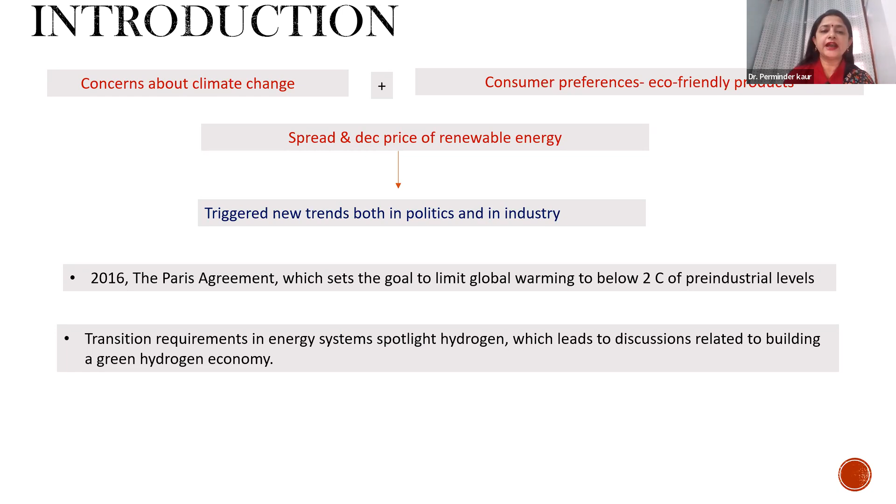This transition requires a change in the energy system. Where earlier we were using fossil fuel based energy systems, there is a need to move towards environment friendly energy sources like hydrogen, which is a totally non-carbon based source. This has led to discussions related to development of a green hydrogen-based economy, involving various individual players like hydrogen consumers, producers, plant operators, manufacturers - requiring combined efforts of all these players to achieve a paradigm shift in the renewable energy sector.

So first of all, why are we discussing this? Why hydrogen? Because first of all, it is a non-carbon based fuel. Being totally non-carbon based, it doesn't emit any carbon monoxide or carbon dioxide, so it is totally environment friendly.

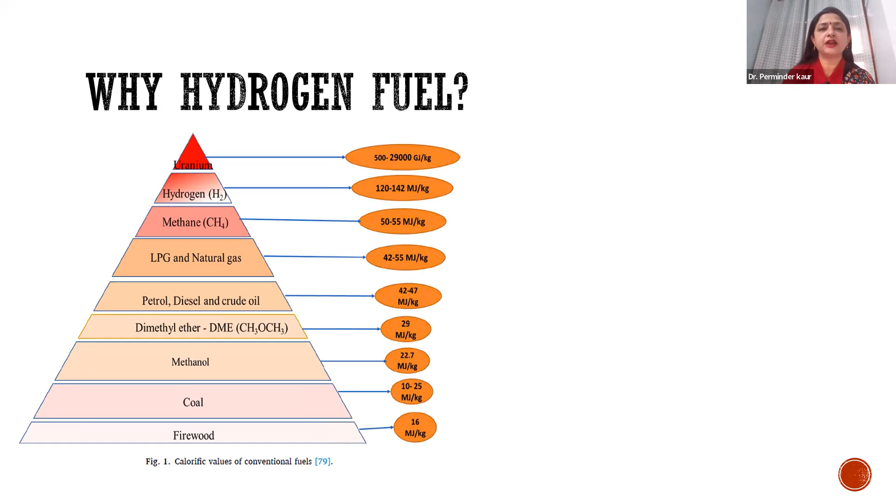That of any fossil fuel, it doesn't emit any bad smell, doesn't have any odor. There is no color. It's totally non-polluting and clean source of energy. It can be used both in gaseous as well as liquid form.

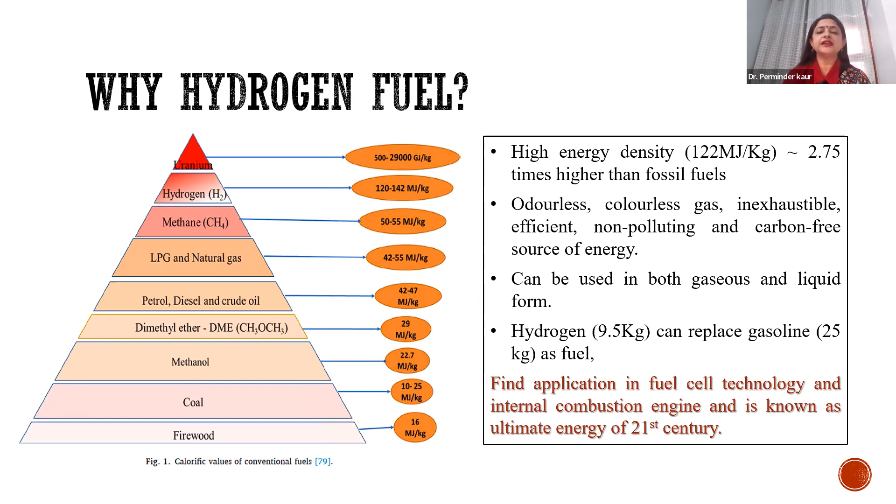Hydrogen thus shows a clear potential to replace other fossil fuels in the energy sector, and it finds application in various technologies. That is why right now we call hydrogen the ultimate fuel of the 21st century.

So what are the pathways, how can we lead to a transition in the energy sector? Presently we are totally dependent on fossil fuel, so randomly we can't develop a non-fossil fuel based energy sector. There has to be a pathway to achieve the transition from a fossil fuel based economy to environment friendly technologies, and this requires a consistent effort.

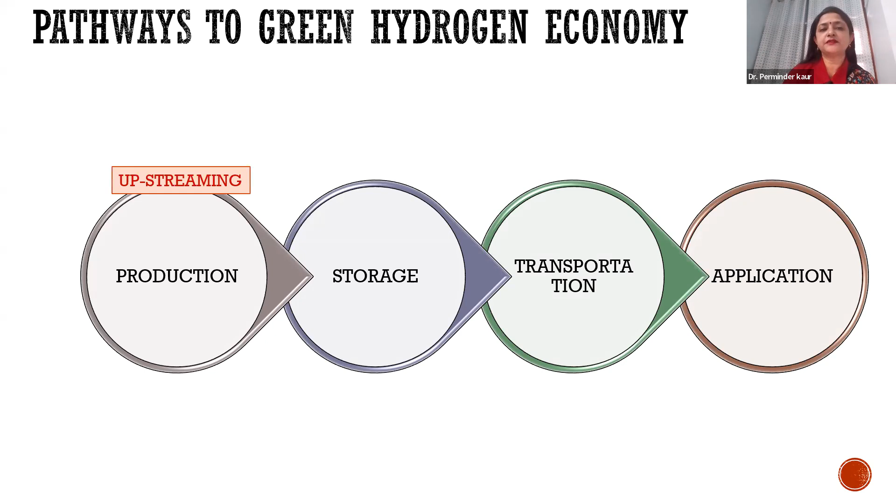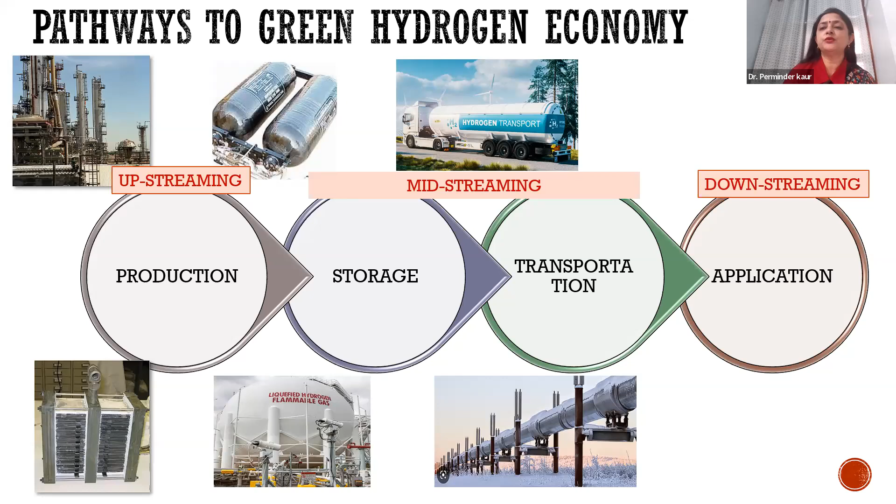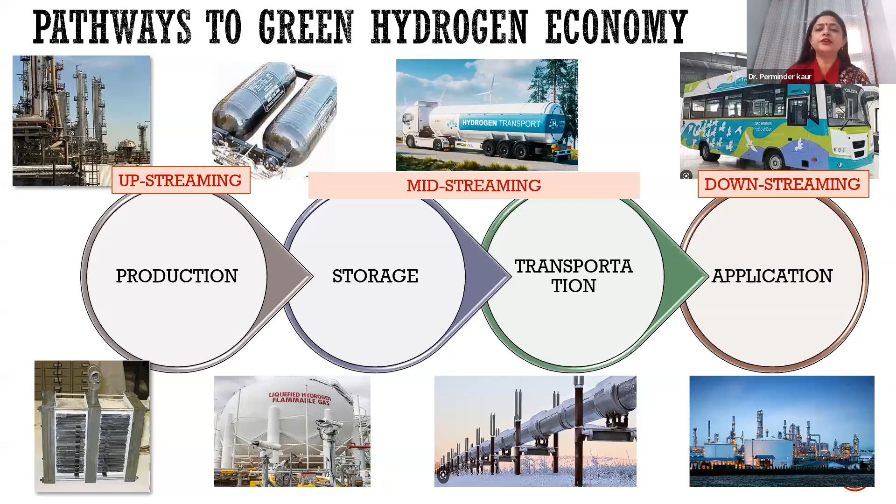The process is totally multidisciplinary and requires effort from a large number of sectors, from upstream production processes like production of hydrogen, to midstream processes like storage and transport, to downstream processes like its application in fuel industries as a chemical, for manufacture of ammonia, for refineries and various sectors. So we need a detailed discussion on all four aspects: production, storage, transportation, and application.

When we talk about hydrogen production, hydrogen already exists and has been used for a very long time by human beings. It is a major component in various industries like ammonia production, steel production, and refineries - a very important component in all these industries.

Traditionally, hydrogen can be produced through natural gas, which can undergo steam methane reforming, where natural gas with methane as its major component reacts with steam to produce water gas, which further undergoes the water gas shift reaction to produce hydrogen. This type of hydrogen, produced through natural gas, is known as gray hydrogen.

Depending on the source from which we are producing hydrogen, different codes are given. Although the hydrogen is the same, it's just a color code given so that we can identify its value chain - how green that hydrogen is.

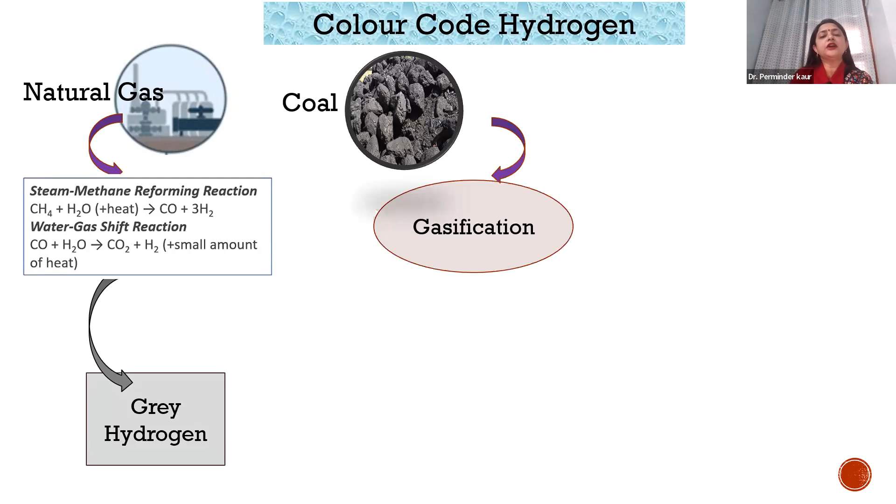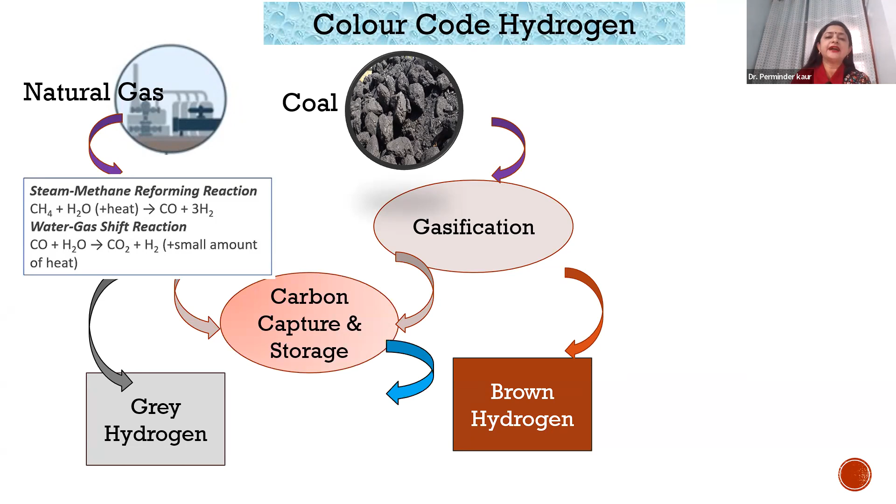In case we use coal or any other fossil fuel, which undergoes a gasification process in a gasifier, it produces brown hydrogen. Then, in both cases using natural gas as well as coal, if we capture carbon to make it environment friendly, that leads to production of blue hydrogen.

Further, in case we use electricity directly from the grid - the general electricity we use at home - it can undergo an electrolysis process to produce yellow hydrogen. So these are the various codes of hydrogen: gray, blue, brown, and yellow, based on the source from which we manufacture it.

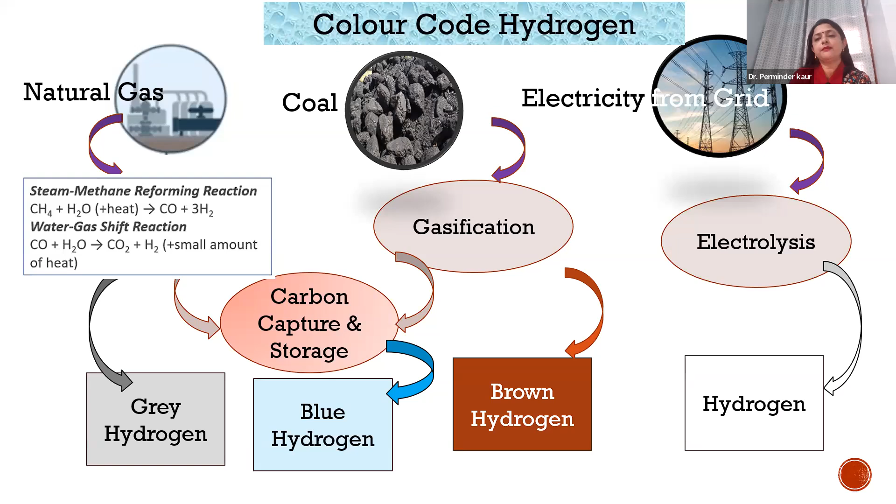Coal and natural gas, various byproducts from refineries, biomass, as well as solar and wind energy - all these sources can undergo various conversion processes to produce hydrogen. When we use coal or natural gas through carbon capture technology, or byproducts of various processes, or even biomass, which can undergo conversion technologies to produce biogas and bioethanol, these can further be converted into green hydrogen.

The future of the technology - green hydrogen - lies in the use of solar and wind energy to run an electrolyzer, which is a totally green process. We use solar and wind energy to run an electrolyzer, and using this process we produce green hydrogen. This is the major impetus and major field of research currently underway to produce green hydrogen.

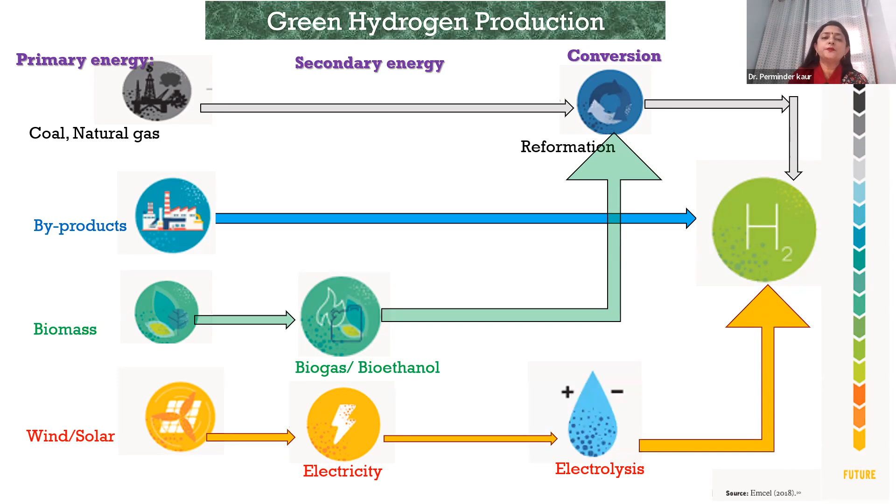As for the present status, the majority of hydrogen is produced through steam methane reforming. Oil reforming or coal gasification is also used to produce hydrogen, while production through environment-friendly technologies or renewable energy to run an electrolyzer currently has only a very minor share of the total hydrogen available in the market.

Before talking in detail about the various kinds of electrolyzers which can be used to produce hydrogen, let's recall electrolysis, as we know from class 9th or 10th. In an electrolyzer, we use water, H2O, which is hydrogen and oxygen. It can undergo electrolysis through electricity, breaking down water into hydrogen and oxygen gas. At the cathode, hydrogen ions react with electrons to produce hydrogen gas, while at the anode we get oxygen gas.

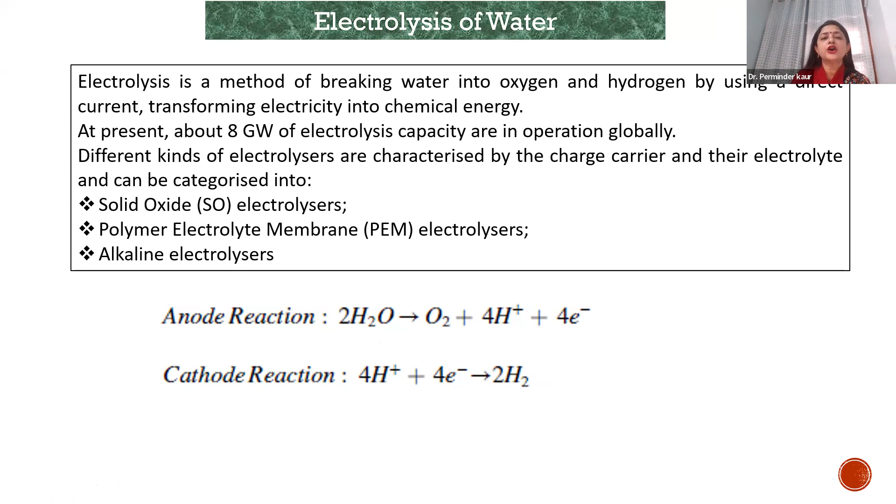Depending on the kind of electrolytic solution we are using, the kind of electrodes, and the reaction conditions we are operating on, electrolyzers can be further divided into categories: solid oxide electrolyzers, polymer-based electrolyzers known as PEM, or alkaline electrolyzers.

The process of electrolysis has undergone tremendous changes over time. Electrolyzers were initially developed in the 1800s through diaphragms, and industrially they were basically alkaline water electrolyzers. There were a lot of challenges regarding their industrial scale application during that time.

Further, a lot of changes have happened in the process. Various technological breakthroughs occurred from 1950 to 2020. During these years, electrolyzer technology went through various changes, from alkaline based electrolyzers to polymer based electrolyzers, and now solid state electrolyzers. When polymers were developed in the 1950s, a technological breakthrough happened in the electrolysis process.

Then polymers were discovered. They were basically used for life support applications. So during the 1950s to 1980s, electrolyzers based on polymers were discovered.

With further breakthroughs in the technology over the complex system, there was development of PEM water electrolyzers, but there were still challenges related to cost. During the decade of 2010 to 2020, a lot of changes in electrolyzer capacities happened, and large-scale demonstration of polymer-based electrolyzers occurred, with many changes in this stream.

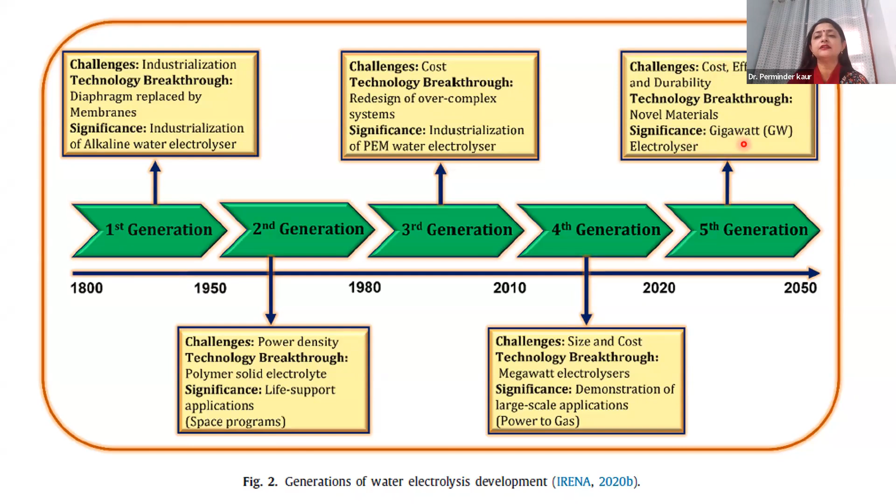In the first generation of electrolyzers, they use a liquid electrolyte solution like sodium hydroxide or potassium hydroxide and water, which can undergo electrolysis. A diaphragm was used in this process, and it can split into hydroxide ions, producing hydrogen at the cathode and oxygen at the anode.

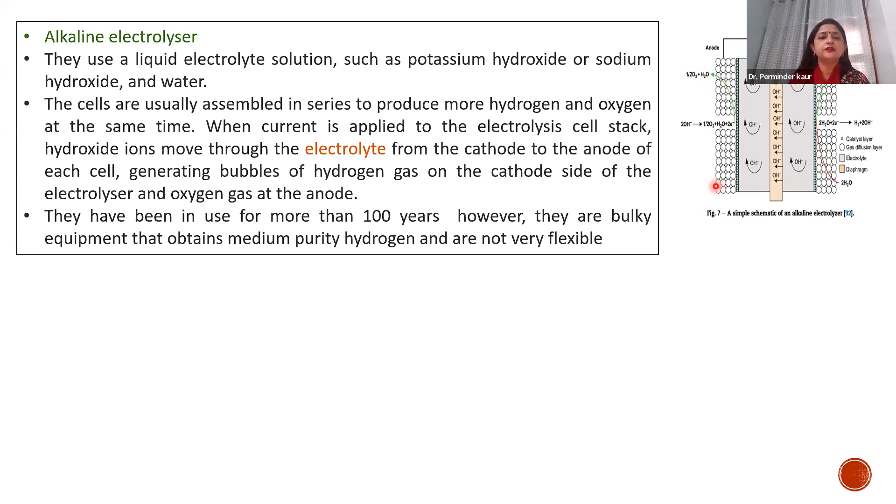There are various advantages of this technology because it's old. This is not something new; we have been using it since the 1800s. So it's well established and available on a commercial scale. Noble metal-free electrocatalysts can be used, their cost is low, and they have long-term stability, but their efficiency is around 50 to 78%, and their cost is around 270 US dollars per kilowatt.

However, availability of electrolyte is a concern, as a high concentration potassium hydroxide solution is required.

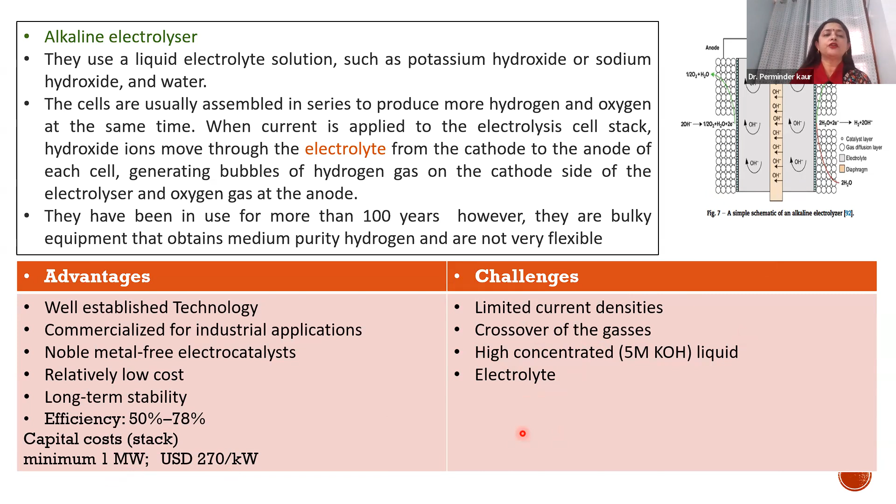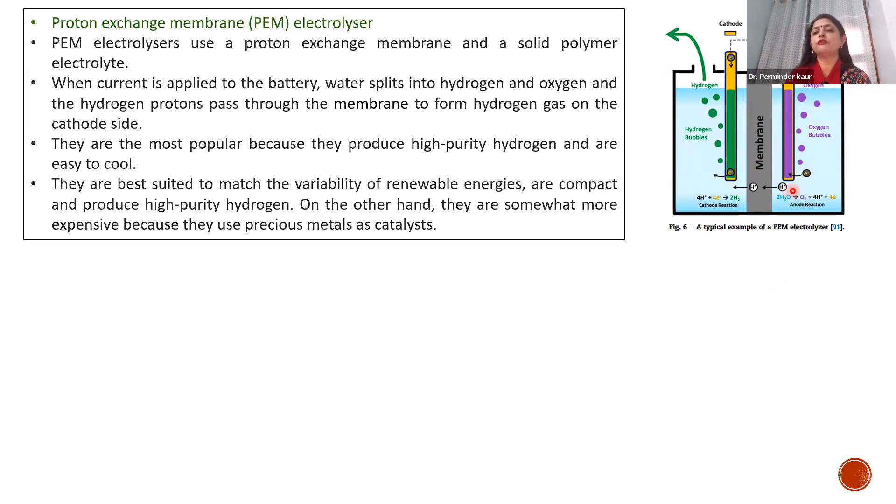A lot of changes have happened moving from alkaline electrolyzers to proton exchange membrane electrolyzers, where a membrane is used instead of a diaphragm. As we can see in the diagram, we have a membrane instead of a diaphragm, and this is a very compact system where hydrogen gas is evolved at the cathode and oxygen gas at the anode. The basic process is the same; it's just the change of system from diaphragm to membrane and development of novel materials, which has led to the development of PEM electrolyzers. Nowadays it is also a commercialized technology.

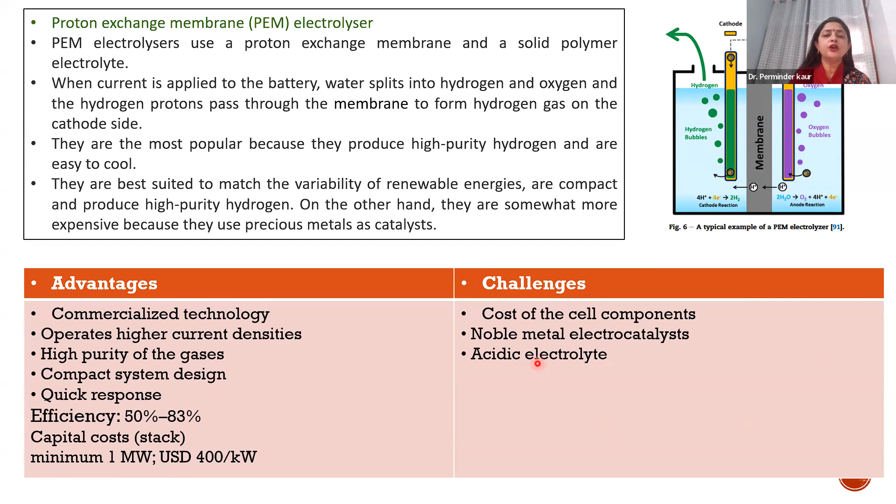There are electrolytes which can further help to reduce the cost of PEM electrolyzers.

Further, solid oxide electrolyzers, which operate at high temperature, are the material of the future, on which various researchers are right now working to develop and transport this technology to commercial scale, improving their technology readiness level. Solid oxide electrolyzers are also known as...

Sorry, is there any issue, am I audible? You're audible, ma'am. Please go ahead.

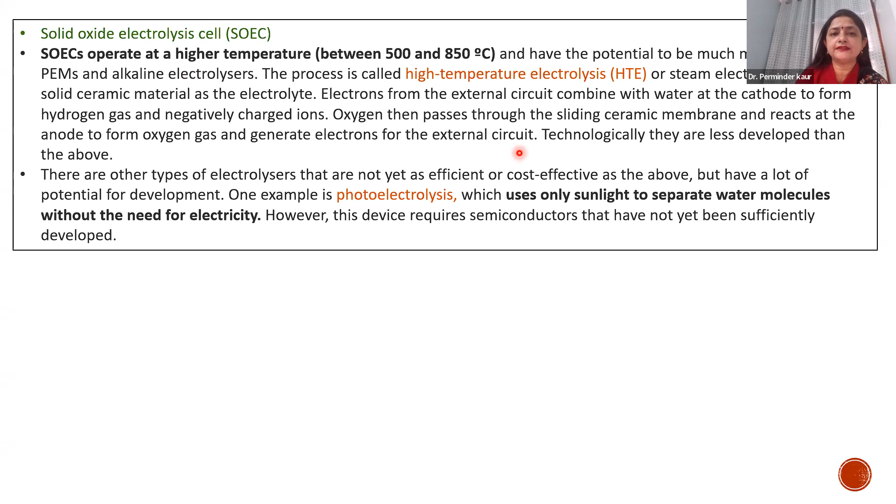Solid oxide electrolyzers operate at very high temperature, between 500 to 850 degrees Celsius. The use of high temperature overall helps in the breakdown of water more easily, leading to higher efficiency in solid oxide electrolyzers. There are various advantages, like they work at high temperature, so they are highly efficient to break down water easily. Their efficiency is very high.

Their cost is right now very high, although there is need to work on the development of their stability and their lab scale conversion to commercial scale. The work is still underway. Various companies and research groups are working to commercialize this technology. There are other types of electrolyzers also, which are not as efficient and cost effective as discussed above, but they have a lot of potential for development.

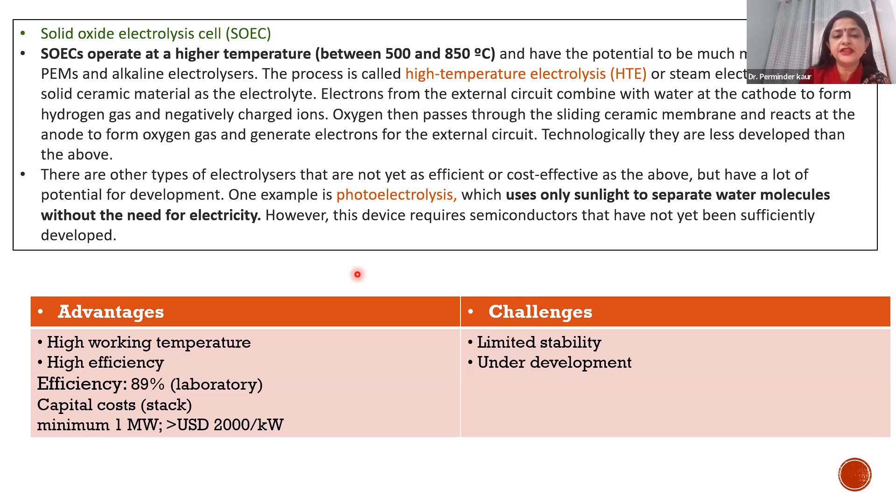One of the examples is photoelectrolyzers. As the name suggests, these use sunlight to separate water molecules without the need for any electricity. Since we will not need any electricity, this is going to be a revolutionary material. Many of these technologies are still under the stage of development. A lot of research is happening every day in the field of electrolyzers, which is the heart of green hydrogen production technology.

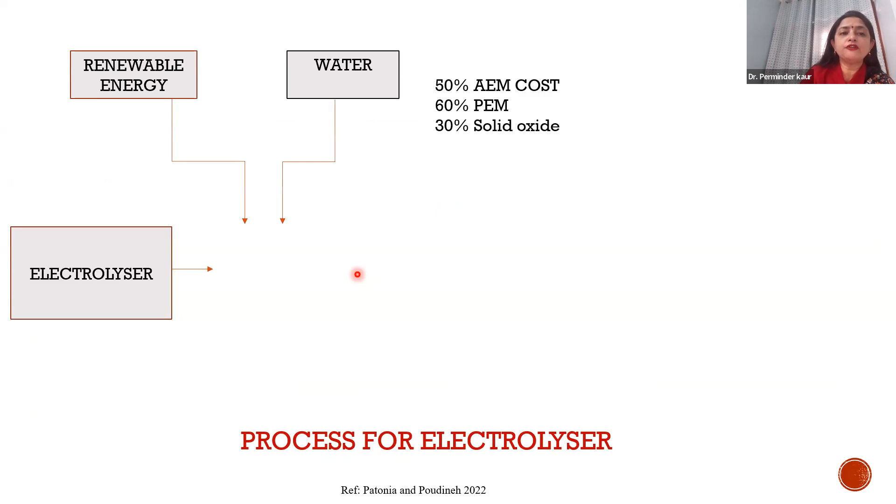What are the various components required for manufacture of an electrolyzer? To run an electrolyzer, the running components required are basically a continuous supply of renewable energy, either solar energy or wind energy, along with the availability of water resources, which can undergo electrolysis in an alkaline or PEM electrolyzer.

Basically, a PEM electrolyzer's cost falls under two components. One is the stack, which costs around 50% for alkaline electrolyzers. Stack cost is very high in case of PEM electrolyzers, and stack cost is around 30% of the total cost in a solid oxide electrolyzer.

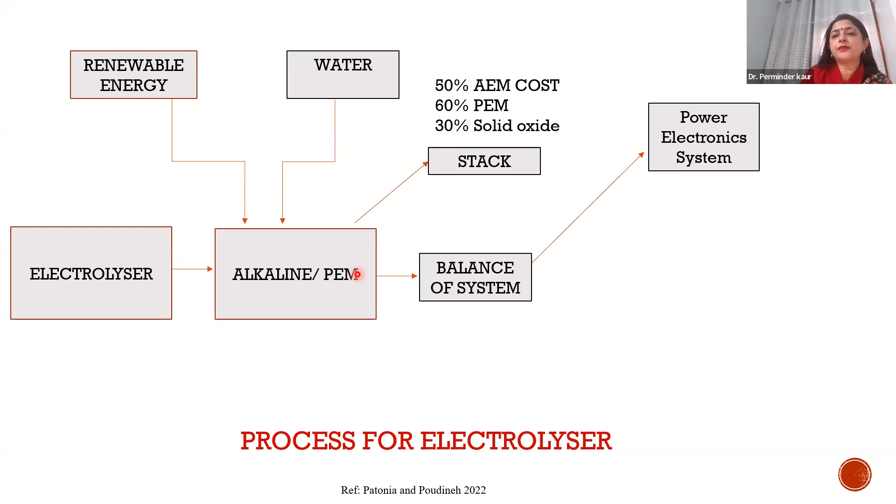The balance of the system includes a power electronic system, a gas purification system, and a water purification system. So the rest of the cost is one component, the stack, and the other component is power electronics, gas purification system, and water purification system. In order to install an electrolyzer, we need all these components. While the stack and electrolyzer will be the fixed cost, running cost will include the continuous supply of renewable energy and water.

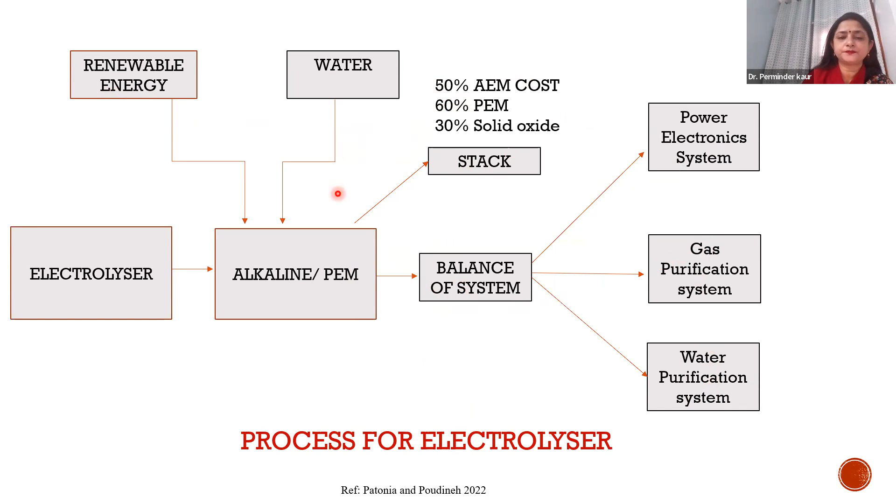All these technologies are right now expensive. So the government, through the National Hydrogen Mission, is providing incentives, support, and capacity building to reduce the overall cost of production of hydrogen produced through solar energy or other renewable energy sources.

A breakdown of the levelized cost of hydrogen from the electrolyzer route has been studied in another report. It has been found that right now the levelized cost of alkaline electrolyzers is around 350 rupees per kg, but by 2050 it should fall to 200 rupees per kg. For alkaline electrolyzers by 2050, the cost should be less than 100 rupees per kg, and for PEM electrolyzer also, through the solar process, the cost should be less than 100 rupees per kg.

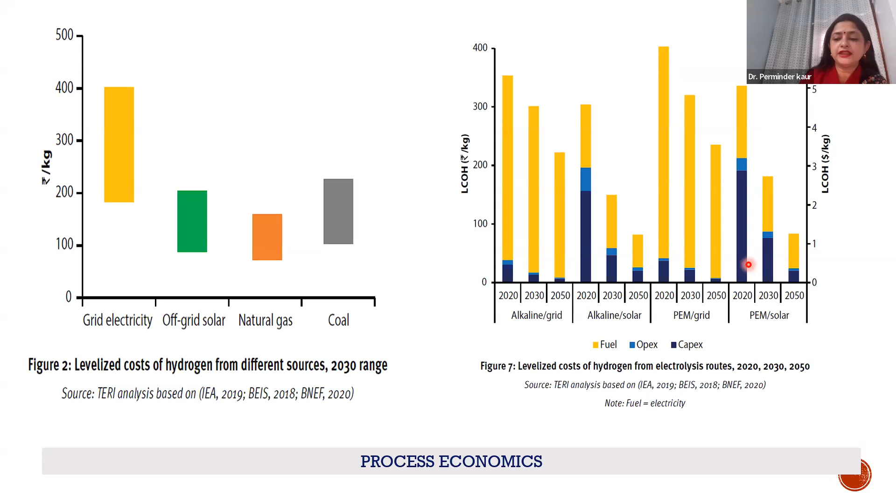The second important component of hydrogen economy is its storage. Various materials and physical systems have been developed, because storage is the main system which will provide a linkage between the hydrogen producer and hydrogen consumer. An efficient energy storage system can only boost an efficient hydrogen economy. We need an excellent, cost-effective, intermittent energy storage system, which needs extensive research.

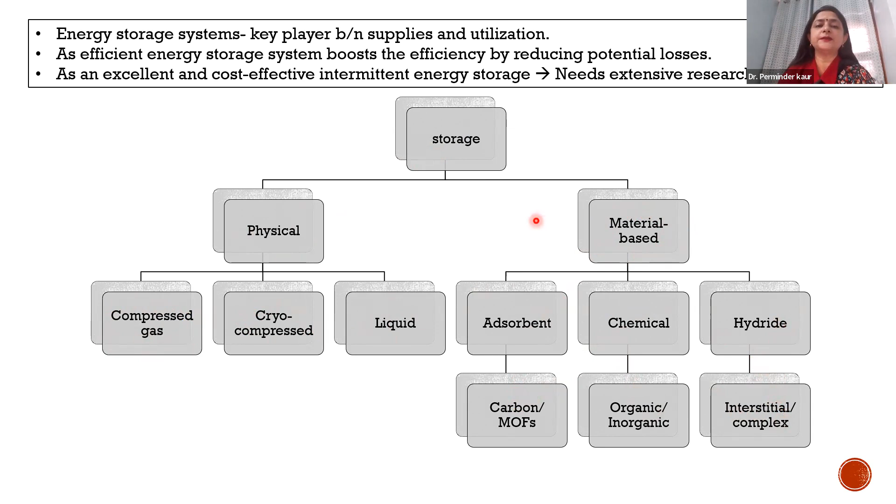Right now there are basically two kinds of materials used for storage. One is the physical system, which includes systems like compressed gas, cryo-compressed, or liquid systems. Then various novel materials have been investigated and studied to store hydrogen. Various kinds of adsorbents, which can be carbon based, or various kinds of chemicals, which can be organic as well as inorganic, or hydride materials, which can be interstitial or complex, have been developed to store hydrogen under different conditions.

The third important component of hydrogen economy is its transportation. Once we have produced hydrogen and stored it under the right conditions, we need to transport it to the applications where it is going to be used. There are a variety of hydrogen transportation systems which have been proposed. The most common hydrogen transportation methods are compressed gas cylinders, cryogenic liquid tankers, or pipelines, or we can blend it with natural gas and transmit it through the same pipelines through which natural gas is transferred.

There are various compressed gas containers, and we have pipelines. We can also blend hydrogen with natural gas. Blending with the natural gas pipeline network is viewed as a way of transporting pure hydrogen to market. All these technologies are under a stage of development.

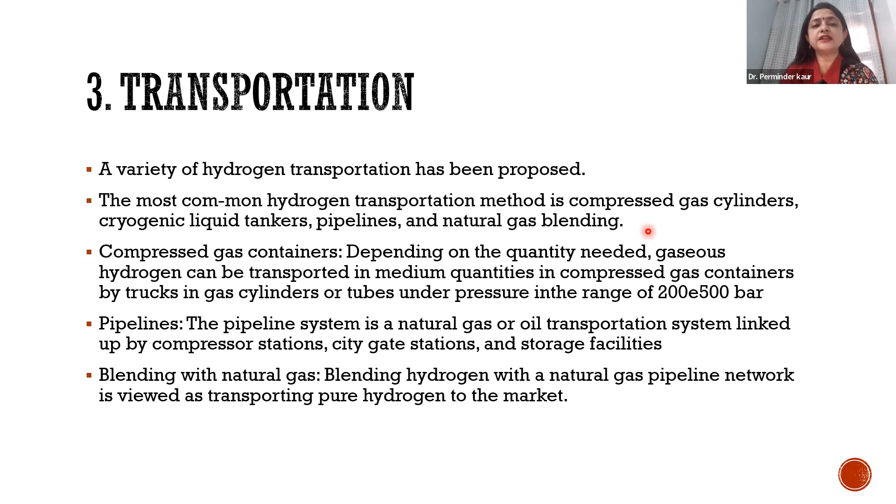Broadly speaking, the hydrogen transportation system comes under two categories: either through hydrogen pipelines, or hydrogen mixed with CNG pipelines, or tube trailers, which come under compressed gaseous transport systems. Hydrogen can also be converted into liquid form and stored under liquid cryogenic systems or LOHC systems.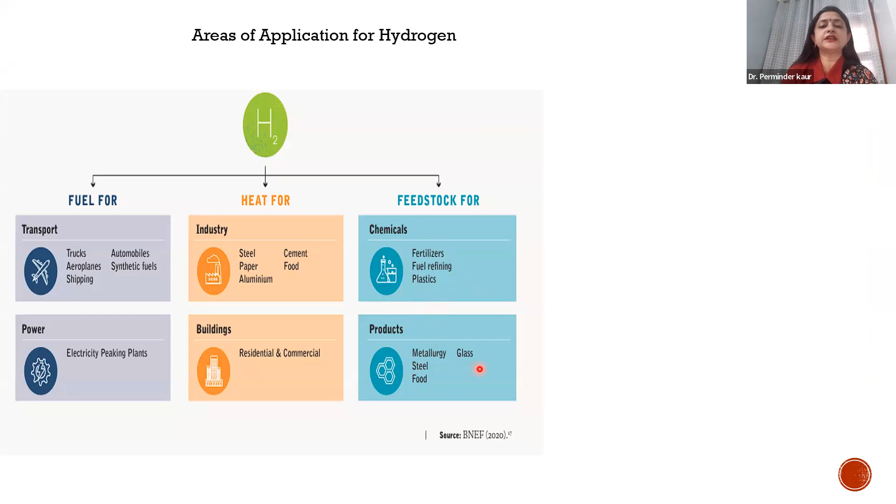Then comes another important aspect of hydrogen-based economy, which is application of hydrogen. Application of hydrogen is not something new. Hydrogen is already used for multiple industrial processes. Hydrogen in the Haber process for production of ammonia is a very well-known technology. It can be used as a feedstock for various chemicals in the fertilizer industry, in fuel refining, in production of plastic. It can be used to produce metallurgical glass, steel, or food. So various kinds of chemicals can be produced through hydrogen.

Then it can be used as a heat source for various industries like steel or cement-based industries, which are known to be very energy consuming sectors. The use of hydrogen instead of fossil fuel in steel or cement industry can give a boost to environment-friendly technology and control the emission of greenhouse gases. Then various industries like paper, food, or aluminium industry, it can also be used for heating residential and commercial setups.

Then one of the emerging areas where hydrogen can be used is in the transport sector. Nowadays you must have read headlines like Germany has launched a hydrogen train, or in Delhi we have launched hydrogen gas buses. Government is working on hydrogen-based train systems, then in the shipping sector. The development of hydrogen as a fuel in transport is one of the future areas, used in trucks, aeroplanes, shippings, automobiles, or as a synthetic fuel. Then various electric peaking plants can also use hydrogen as a source of power.

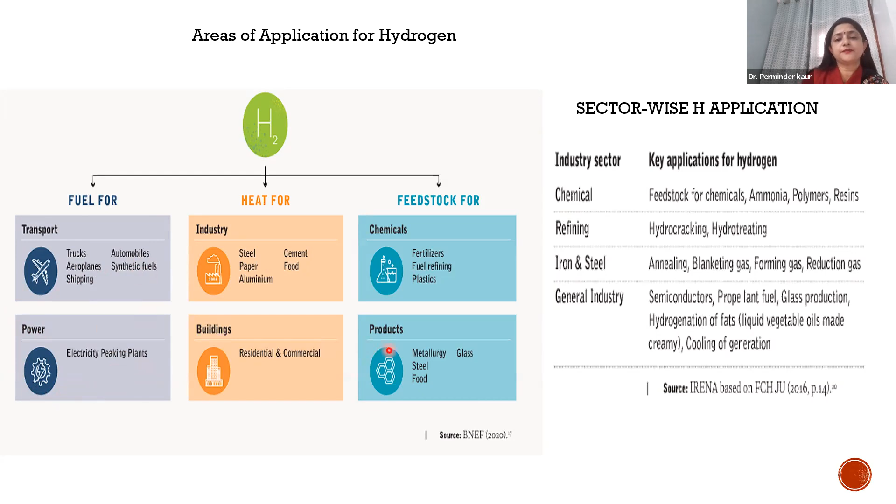Now what is the significance of hydrogen for the market? Various reports and studies have been undertaken by research institutes and think tanks, various organizations, everyone trying to investigate the effect of hydrogen on the market. It has been found this is a really exciting time for the market, with a large number of hydrogen-based companies in the stage of launching, or already launched, many of them listed in the stock exchange in the past 12 months. Market has seen a large change.

Global hydrogen market has been evaluated at around 0.83 billion US dollars in year 2021. Various projections and expectations are there from the hydrogen sector, and it has been found that the hydrogen-based market can increase to around 90 billion dollars by 2030. So for early investors, there is a lot of scope, they have a lot to watch.

From an investment perspective, it is highly encouraging to see government backing in this emerging market, as it drives interest and reassures investors in viability. Government is a big investor nowadays itself, trying to support the development of various technologies through incentive schemes, tax breaks, and mandates under a stage of development. So with this rapid development of technology and research initiatives, large-scale adoption is expected within a few years.

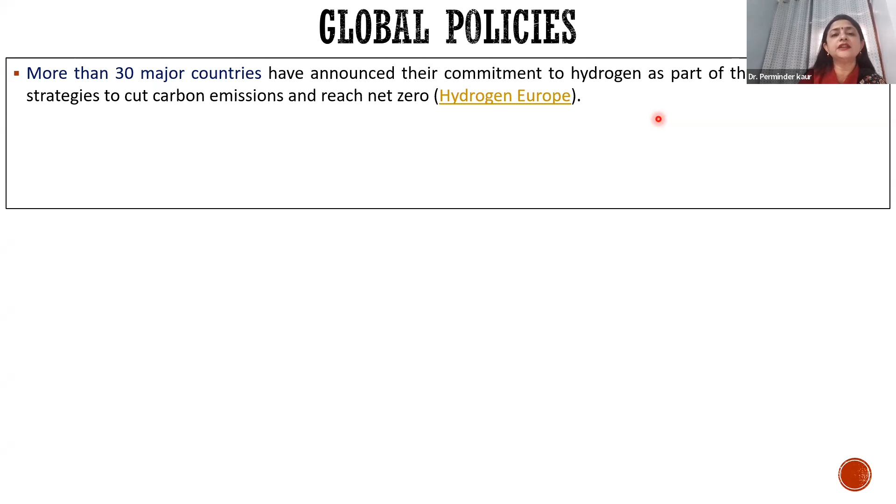Now on a global scale also, various countries have announced their commitment for hydrogen as part of their strategy to contain climate emissions, reduce greenhouse gases, and meet net zero targets. Like in the United States and European Union, they have given a target to reach net zero by 2050, while India has a net zero target of 2070. We can't reach there in a day; we have to move step by step through the use of these environment-friendly technologies.

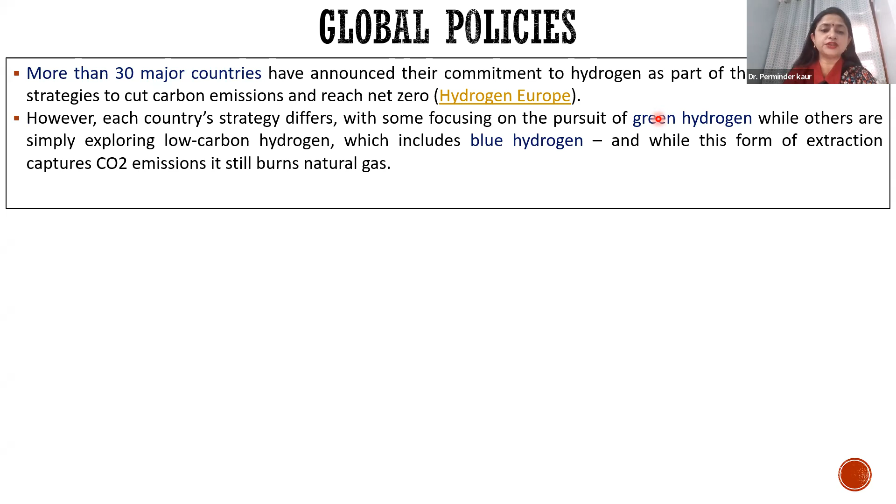Looking at the Indian scenario, National Hydrogen Mission has been launched by the Government of India. Recently, some guidelines have been launched again in January 23. Government is providing support to various organizations so that India can become a global hub for the production, usage and export of green hydrogen and its derivatives. This will contribute to India's aim to become Atmanirbhar Bharat.

The mission will support the replacement of fossil fuel or fossil fuel based feedstocks with renewable energy sources like green hydrogen. So the research work as well as the applications of hydrogen, in the usage and production of hydrogen in these sectors will be encouraged.

The expected outcome of this mission by 2030 includes annual production capacity of 5 million metric tons per annum, renewable energy capacity addition of around 125 gigawatt, with investment of around rupees 8 lakh crore. It is expected that this will lead to creation of around 6 lakh full-time jobs, and 50 million metric tons of CO2 emission will be curtailed. These data we have taken from the website of Ministry of New and Renewable Energy.

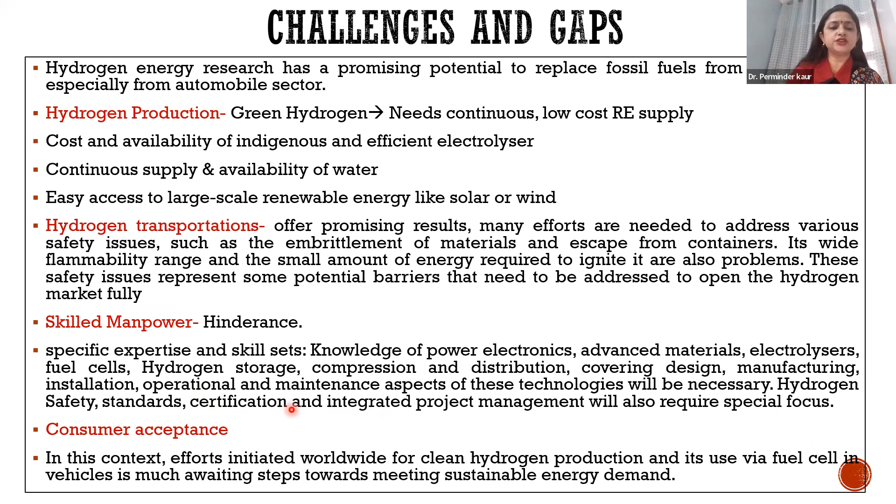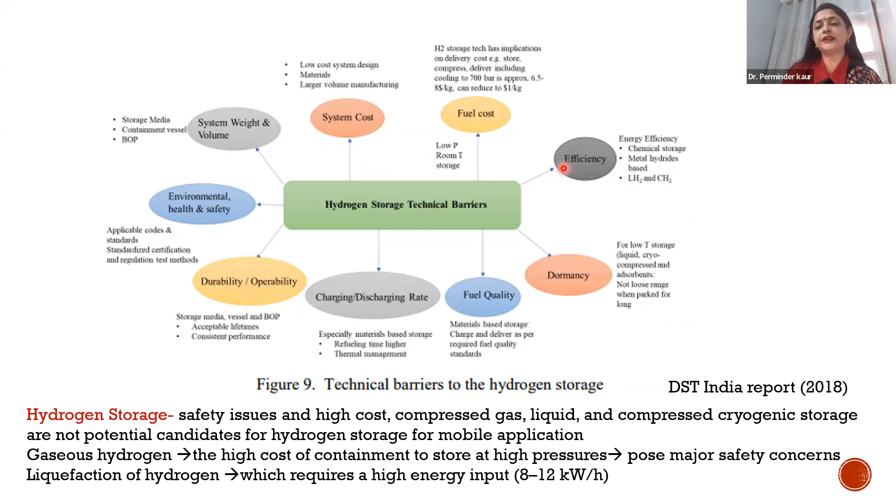As a recommendation, it has been found that when we spoke to various startups and entrepreneurs during our stakeholder analysis, they found that there is a kind of aversion in the financial sector also, because hydrogen application as a fuel is something new. So even financing hydrogen products - there is a need to provide support for risk mitigation measures for industrial players, which is very important.

This can be done by providing concessional funding, educational and capacity building for industries, participation of public and private sector, and shared learning on the technology readiness level and demonstration of hydrogen projects. This is very important. Also, measures are required for special funding of domestic pilot projects.

International cooperation is also very important. Now, since India is hosting G20 this year, we have got the presidency. This gives a lot of opportunity for the green hydrogen sector, because no one country can achieve full expertise on all the four aspects of the hydrogen economy.

International collaboration and cooperation will play a very important role. Science diplomacy has a very important role here. This has given India a unique opportunity to become a global leader in the hydrogen energy ecosystem.